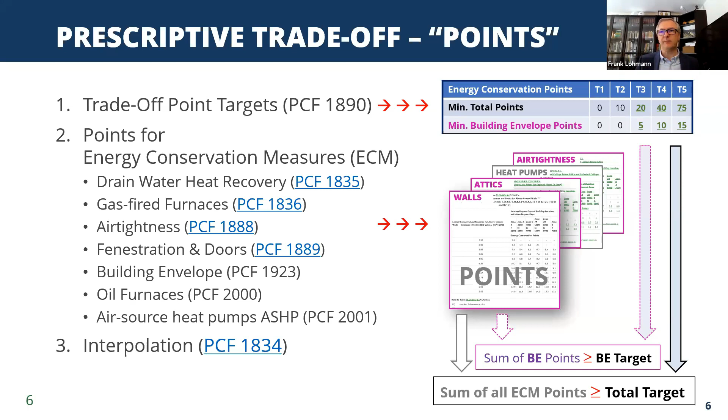First, here's a quick refresher on how this method works in terms of an example. The target points for tier 2, which is already in the code, is 10, but you also need to comply with tier 1 as a prerequisite, which means an HRV or ERV is installed and all the prescriptive requirements in 9.36.2 to 9.36.4 are met.

This is an example we actually presented in 2022 as a part of a webinar as well. For this example, we assumed a 2,000 square foot single family detached home in Edmonton, which is in climate zone 7B. We'll assume an air tightness test result of 2 air changes per hour, so yes, this home will be tested. A heat recovery system with a sensible heat recovery efficiency rating of at least 60%, and a hot water tank with an energy factor of 0.8. This gets you exactly 10 points.

In the 2020 NBC, the minimum points available in this climate zone start quite high for above ground walls and air tightness, and the maximum points for all the other categories may not total to more than 10 points, meaning that you might not be able to reach tier 2 in this climate zone without either improving the above ground wall or the air tightness. Now, this may change in the 2025 code when there are a lot more ECM points available, and we'll see a few of them in a few minutes.

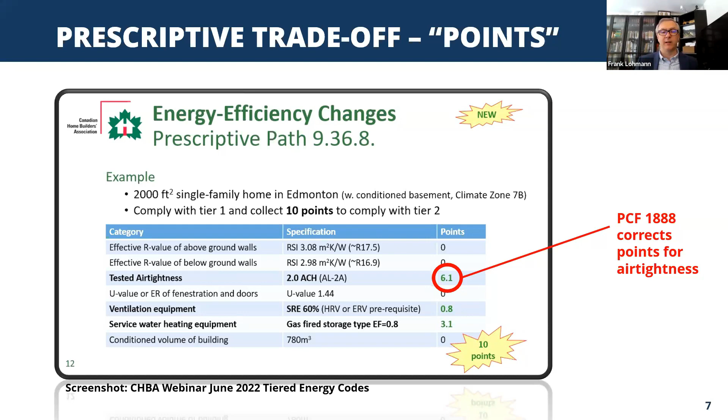So let's start with water heating equipment and look at some points in detail. Here are the points that already exist for a number of water heater types. Our Edmonton example here, a house had a gas-fired storage type heater and got 3.1 points for that. One thing to note here is that electric water heaters do not get any points. Apparently, because in the modeling they are the reference benchmark, but nonetheless, we think they should be listed here as an acceptable solution. We might put a comment to that effect because we think it's otherwise confusing that they're not acceptable.

Another point here is that heat pump water heaters are not getting substantially more points. This may be surprising, and it is due to the fact that when the modeling was done for these points, the reference house also got a heat pump water heater. So there were very few points here to be gained. This is not the case under the EnerGuide, I'm told. The committees agreed to look into it, but the work has been deferred to the next code cycle. So this will be one comment that we're making, although it may be discarded as it is not related to any actual proposed change, but actually to the existing code.

Yes, and I will leave the targets pinned to the top here for your reference. And you have probably noticed the QR code on the bottom left. If you scan it, you can read along on the actual proposed change form online for those that are out right now.

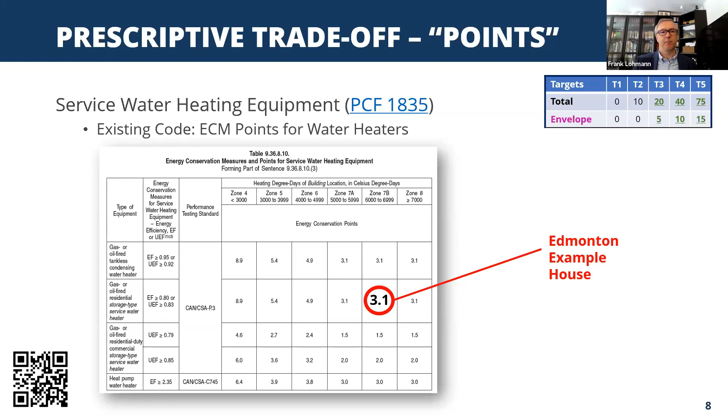Here are the points for drain water heat recovery, proposed to be added. A few other requirements are proposed in addition to these points, meaning you have to do a few things before you get them. You have to follow the manufacturer's instructions. If 1 or 2 showers are in above ground stories, you have to provide all of them with drain water heat recovery. Where there are more than 2 showers above ground, at least 2 of those showers have to be equipped with drain water heat recovery to get these points. So if this is a feature in your homes, these points would go towards your total target points.

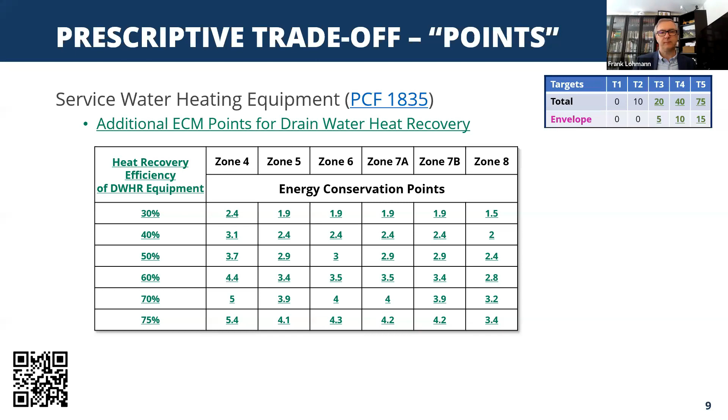Let's continue with HVAC equipment. As you recall from the Edmonton example, the points for HRVs are already in the code. However, considering that a sensible recovery efficiency of 60% is the prescriptive minimum for HRVs and ERVs, the points on the top row of this table are kind of free points because that's your minimum anyway. But that's where the Edmonton example came from, as you see the 0.8.

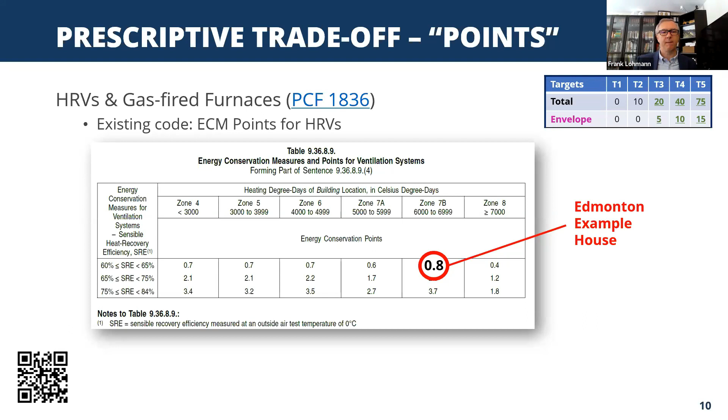What's proposed for gas-fired furnaces here, although these points don't amount to much, I've not seen any points for electric resistance boilers or furnaces here either, maybe for the same reason as for the water heaters. So that's something to be clarified - maybe Alexander can comment on that later. This is for gas-fired furnaces, the points for these 2 efficiencies, depending on climate zone.

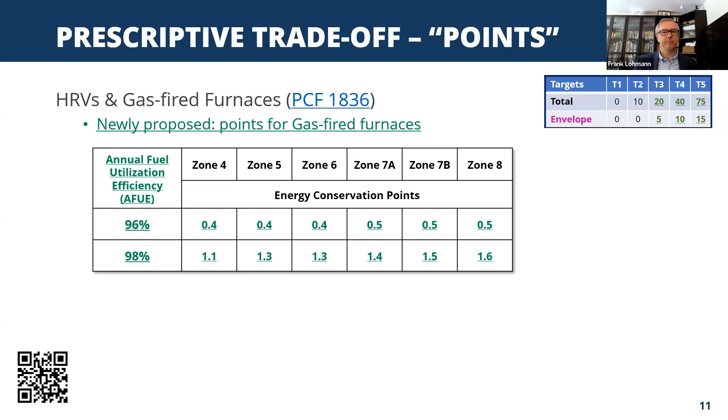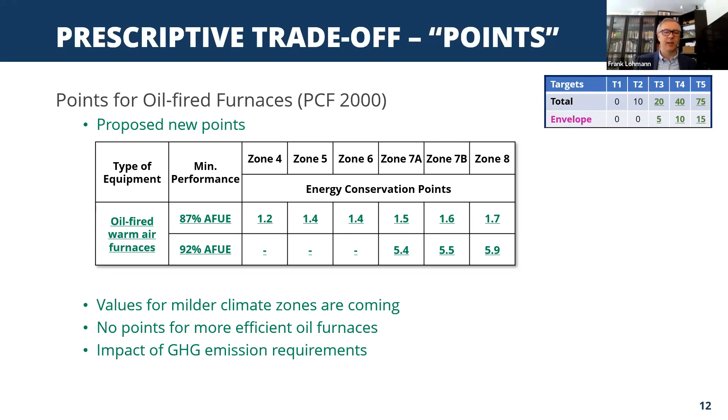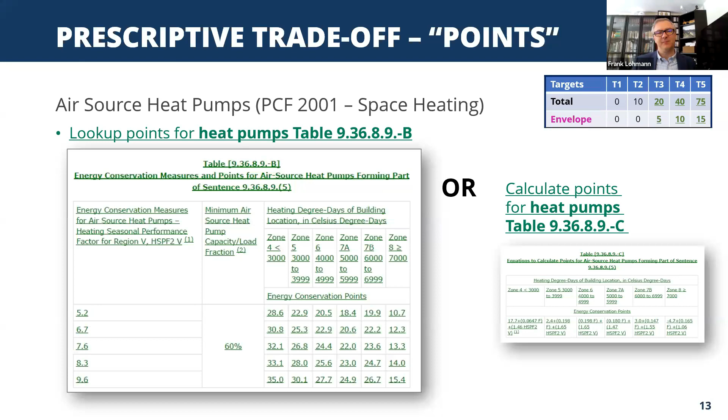So back to air tightness. You remember the example, and I made it easy for you to find it here, highlighted in yellow. This is worth paying attention to, since the energy conservation point values in the code being adopted in your region may change again when the 2025 codes come around. There are 2 corrections made in this proposed change to this table on air tightness. Number 1, the values for attached homes below were moved up 1 category because that was truly a publishing error, meaning 2.5 air changes per hour would give you points in attached housing. The other correction, maybe more significant, is that NRC found an issue with how the points were modeled for the last code and corrected them.

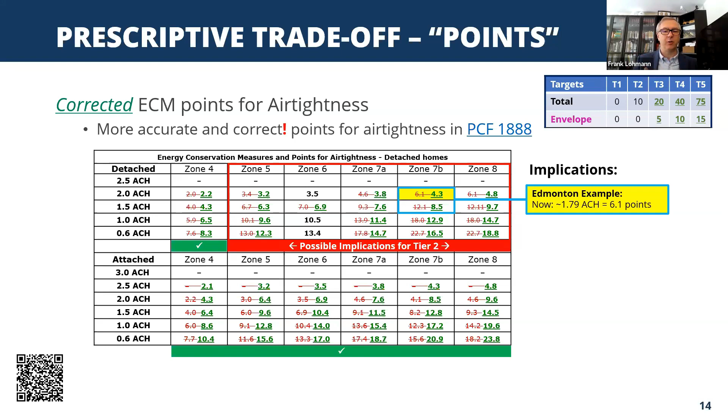So for our Edmonton example, this means you would need a 1.79 air changes per hour test result to get those points now under the new 2025 code, where under the current code an ACH of 2.0 was good enough to get the points. The same is generally true for all energy conservation points values in climate zones 5, 6, 7, or 8 for single-family homes, except for zone 6, which remains almost unchanged. For attached homes, it's the bottom table - the impact is that you get more points for the same air tightness value compared to what's in the code today.

Another important proposed change deals with interpolation of ECM points. This is a great addition.

PCF 1834 simply adds a footnote to all the point tables for all kinds of things to say that you can use linear interpolation between measured efficiency and points. This applies to all tables, not just air tightness. That is how I calculated the 1.79 air changes per hour to get my 6.1 points that I needed to meet tier 2 in Edmonton.

There are two methods generally. A graphic method, on the left, you would draw two axes, one for points and one for ACH, and then connect the two data points that you know from the table. And then you know that you need 6.1, so you find that on your axis and you go up to the data line and you see what kind of ACH value corresponds to it. Or you use the calculation method on the right. I have started that with the formula at the top and filled it out for this example and did the calculation. So you'll have that in your PDF. It'll come in handy, and it gives a lot of flexibility if you're between points.

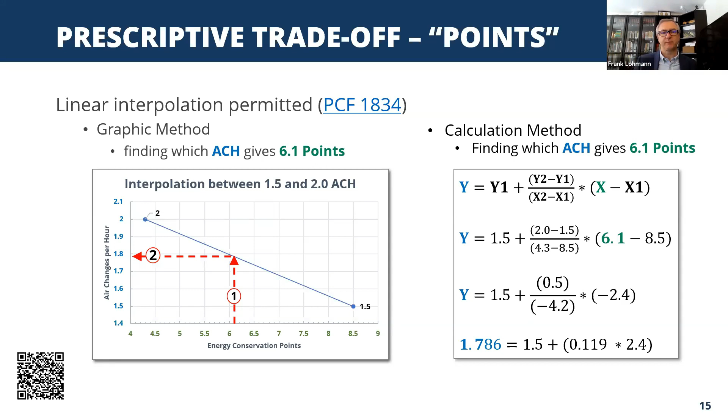That brings us to windows and doors. Here we already have some point values, and there are some that are proposed to be added.

One thing I noticed on this change is that the costing is based on 2019 costing data that was updated to include inflation. However, we've done a review and found that the industrial product price index, at least for construction-related products, may have gone up 45% since 2019, and that labor cost is also up by between 25 and 28%. So if you review this change, make sure you review the impact analysis section and let us know whether the costing data needs updating here. We would make that part of our comment as well.

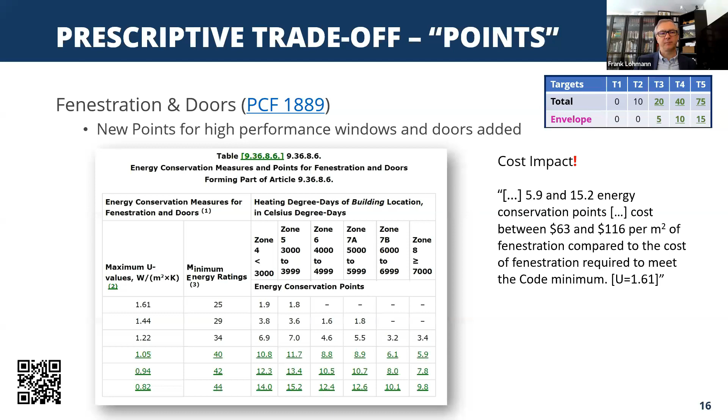Here's PCF 1923, also called Building Envelope Central, and this change is going to the 2024 winter public review. I called it Building Envelope Central, it's not officially called that. This table for walls is already in the code.

I will flip through the next 7 or 8 slides very fast. They all cover the tables that this proposed change contains, so all informative. I just want you to see what is proposed so you can check it out, what categories of ECMs are available, and then you do your own calculations about them.

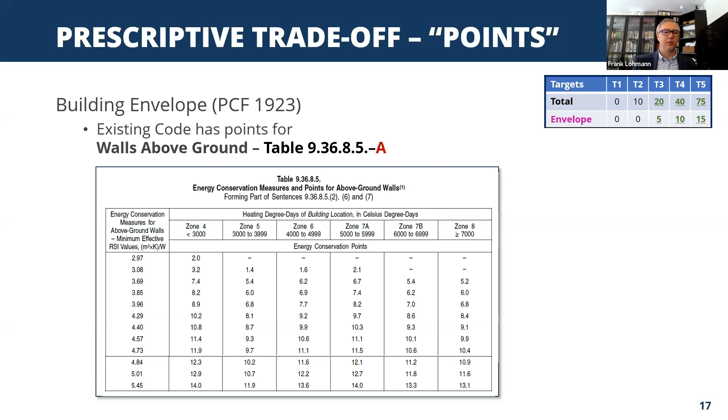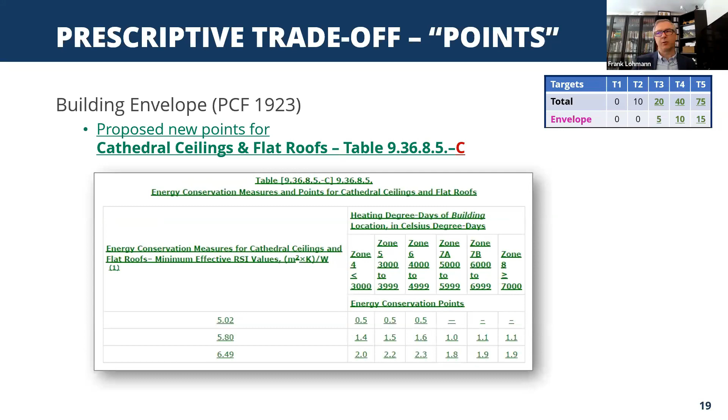Here are the proposed points for cathedral ceilings and flat roofs. A very similar story to attics. Again, even fewer points because the R value is not as high.

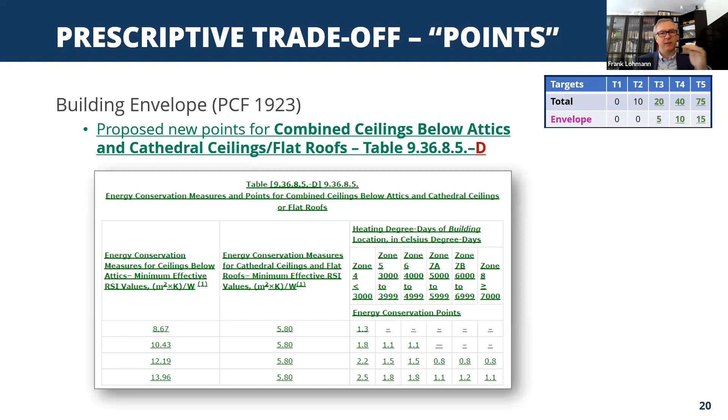Here are the proposed points for assemblies that combine ceilings below attics and cathedral ceilings and flat roofs. I just learned, and maybe I'll explain it here, that this is for roof types that have both the attic ceiling and the cathedral ceiling. Maybe Alexandra can explain this a little bit more at the end.

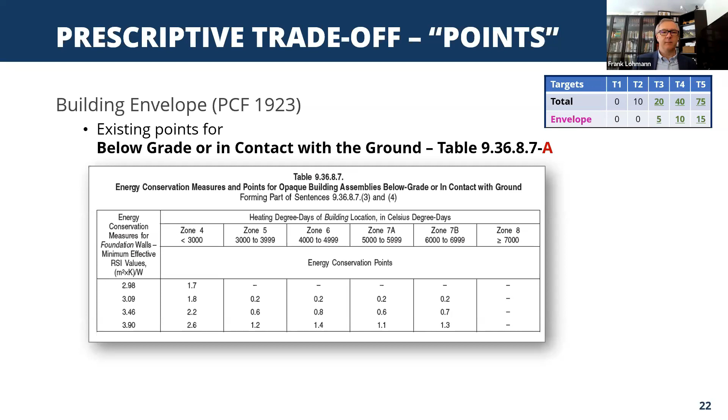There you go. Okay, and for the last table for this proposed change, this is the one for slabs on grade. All these points are proposed. These points were not necessary for tiers 1 and 2, but when the committee realized that tier 5 was pretty difficult to reach, especially in colder climate zones, they added all these points tables. And keep in mind, this is so it's for tier 5 as well, tier 4, tier 3, and for other tiers now.

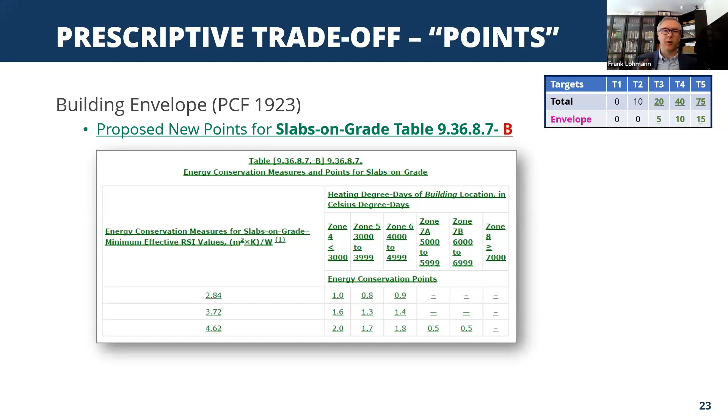Several questions coming in on air source heat pumps as well as DWHRs. So I'll start with one: is an air source heat pump supposed to be the principal heating device to get the points, or can it be dual fuel hybrid? That's a really good question, I can take that one on.

As Frank presented, there were really two approaches under this prescriptive points-based approach. You could either use a table that fixed one key variable, which is basically how much of your peak heating demand is being met by the heat pump. One table fixes that at 60%, and you're able to look up exactly how many points you'd get for that type of installation, which implies that 40% of that peak heating load is being met by some supplementary system. I'll be talking in more detail about that specifically later on in this webinar.

Great response, Alex. Another question regarding air source heat pumps, so perhaps you'd want to take this one as well: for the air source heat pump requirement, does it specify if they need to be cold climate?

Very good question. Under the Tier 5 prescriptive package that Frank will be covering next, there is a requirement for it to be cold climate. However, some of you following the evolution in the regulatory space around air source heat pumps understand that the metrics are changing. There's regulations being introduced continuously—even in 2025 there'll be new requirements, mostly on the energy efficiency regs. I'm going to be touching upon how the energy efficiency regs play with the prescriptive requirements of the code.

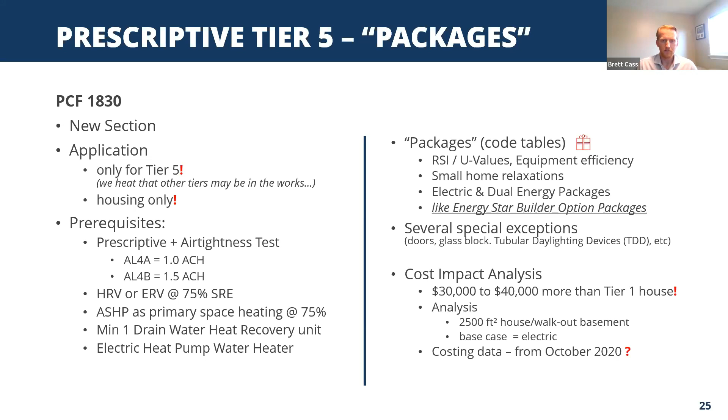Where the homes probably differ a little bit is on the next slide. Maybe those R-values of the wall assemblies and envelope assemblies are a little bit higher than what we might typically see. But keep in mind our builders are able to really optimize and find the low-hanging fruit on their envelope assemblies. So for example, on the wall assemblies, maybe in a zone 6 home, instead of a 5.69 wall, on average we'd see closer to an effective 5 or even a little below 5. That's probably like an R28, R30 or so to convert to R-value. So that's to give a little context on the average CHBA net zero home.

Obviously very few homes build the exact average home. There's a whole variety, but just a bit of context from the voluntary side of things.

Thanks, Brett, that's great. Alex, now you can see if we have questions maybe. Yeah, a lot of great questions are coming in, so I'll start with this one.

Do any of the building envelope tables allow interpolation based on assembly RSI, or only the air tightness tables? I guess what they're asking is, can you interpolate? Go ahead, I don't know if Alexandre wants to answer.

Maybe I don't think you can, because this is a package, take it or leave it. Is that correct, Alexandre? That's correct. And so I just want to clarify that this is a separate compliance path, although it is prescriptive. This one does not allow interpolation. It's inflexible by nature - this is what you shall do.

And the points-based approach does allow for interpolation and allows you to mix and match the measures depending on your supply chain and whatnot. Essentially, this is a copy of the prescriptive path 9.36.2-4 in one table, that's really for tier 5. So that's really what this is with the prerequisites, and this is essentially a copy of all the tables. So there's no interpolation. Yeah, that's great.

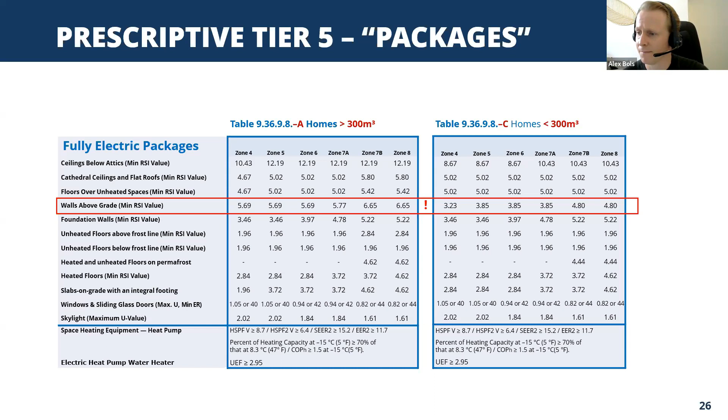Alexandre, you want to take that? Or is it province and territories? Is it government? Do you get the sense from the question that it's governments, or is it province and territorial observers from the industry? Because there's potentially two different answers here, but it's not clear.

So maybe I'll give the one for the industry. If anyone is out there - a builder, renovator, developer, modular builder - and you think you need to get involved, give Alex or myself a call, and we will make sure that you find out where the discussions take place, so that your perspective from your region or locality or province is reflected.

And that's incredibly important. We do our best, but sometimes we miss things. So that's my answer for the industry, for the observers.

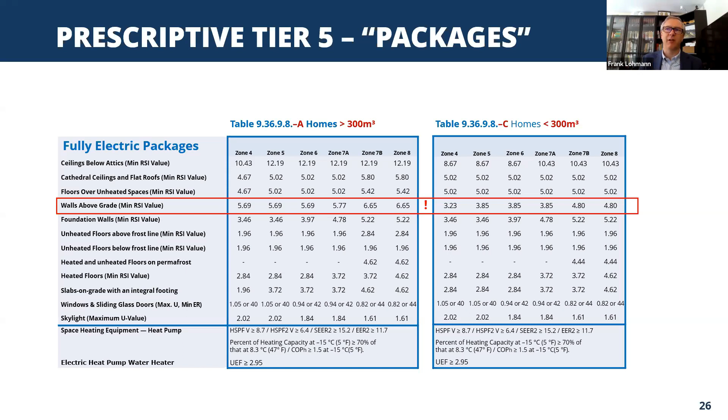In terms of provinces, how can provinces get involved? Maybe Alexandre, do you know more about the other tiers, 2, 3, or 4? There is a task group working on that, and I'm happy to share a link to the schedule of when those task groups are meeting so you can join the discussion. Under the new governance framework of the code's development process, the intent is to put the provinces and territories in the driver's seat to provide the policy guidance. However, that's pretty high level, and they generally don't tend to get involved in the nitty gritty, so we'd encourage you to engage at the task group level.

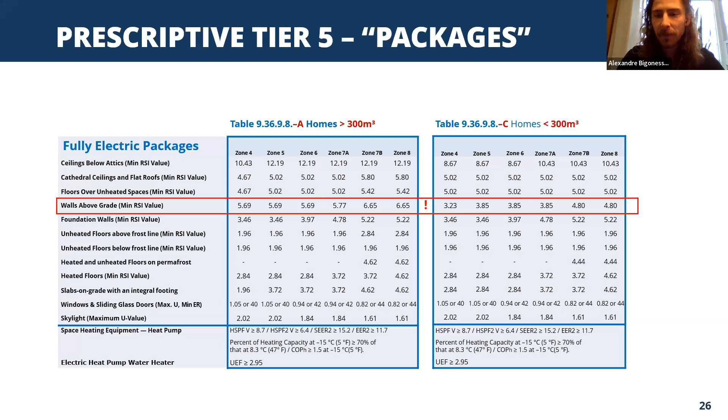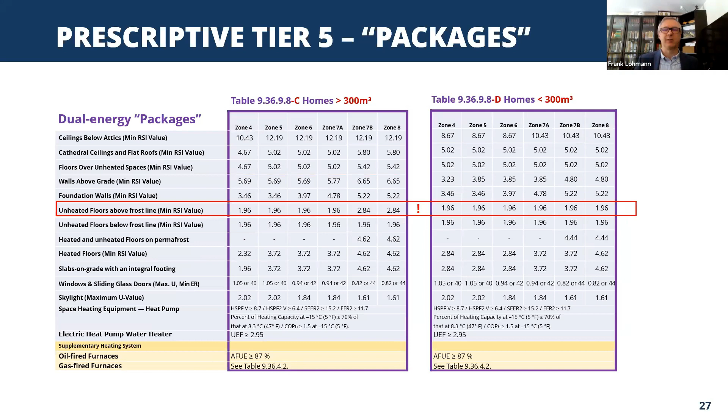Ultimately, CHBA is in favor of that too, so if we can push tiers 3 and 4 with packages like this, we would like to see this. I will try to find out what the timelines are for that. I think, Alex, am I correct?

We need to move on. Is that... You know the look on my face, that yes, definitely. But there's more questions, so Mark, if you have some good ones, mark them for the end. We'll take care of them at the end. Thank you.

This one is a quick one, just one slide. This change is available at public review for comments right now. It was developed by a committee that looked at the potential consequences of high-performance homes. In other words, this change was developed to avoid unintended consequences of highly energy-efficient homes, namely the risk of overheating.

This risk had been identified by many energy committees since 2010, and CHBA had written to the codes bodies in 2020 to fix this before the 2020 codes were published, but to no avail. And this is not the risk of overheating from extreme climate events. It's just talking about the risk of overheating from the point of energy efficient design.

So on the prescriptive side, it is proposed to introduce a maximum solar heat gain coefficient for windows and glazed doors based on how many windows and doors that home has. A requirement was actually in the original National Energy Code for houses in 1997 already, but that one was never added to the fenestration requirements in section 9.36. You can see in this table here, for a given fenestration and door to wall ratio, or FDWR, you'd have to select fenestration products that fall below a maximum solar heat gain coefficient.

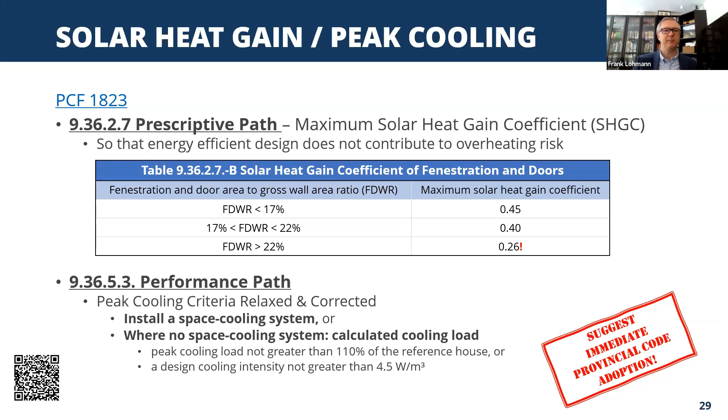Absolutely. And on that, Frank, are you ready to continue to move forward?

Move on, thank you. So the next topic is greenhouse gas emissions, another significant change, another significant first in Canadian building and energy codes. It is proposed that greenhouse gas emissions from buildings be regulated in the Building Code Section 9.36 and in the National Energy Code for buildings. I'll give you a 30-second primer on the life cycle of greenhouse gas emissions.

The emissions that occur during the extraction or production of raw building materials are called embodied emissions, because they have already occurred when the building material arrives on site. Regulation of embodied emissions from building materials is expected for the 2030 codes.

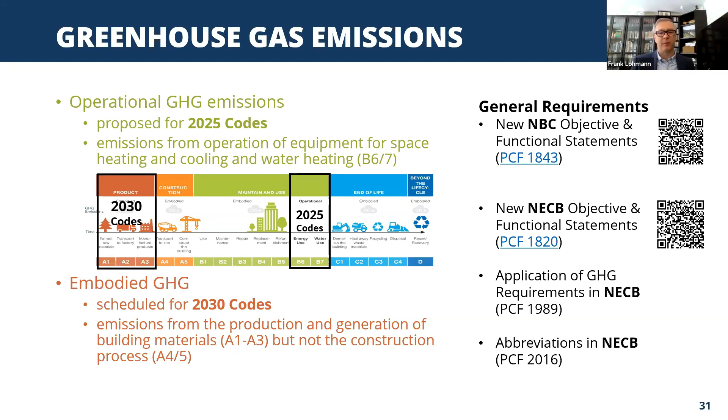So here's what the new objective looks like, and the new functional statement. In short, it says that greenhouse gas emissions are unacceptable, and the greenhouse gas emissions the code addresses are those caused by excessive emissions of greenhouse gases, and the building fulfills the function of limiting operational greenhouse gases.

It makes one point very clearly for sure, but it isn't as well expressed as some of the other objectives. We will be commenting that this is too broad, to the point where the objective, which is the goal of the requirement, is identical with the function of the building that achieves that goal. The third level objective simply repeats the broad goal of the second level objective. We also think the phrase 'as a result of design or construction of the building system' is already addressed by the building envelope, energy, and equipment efficiency. So that's energy.

The emissions, however, are a function of the fuel selection and operation, or at least intended operation, of building energy systems. So we would like some recognition in this text that the control of excessive emissions is not within the purview of building designers and builders, but in the quality and cleanliness of the energy that may come into the building through public infrastructure like electrical wires or gas lines.

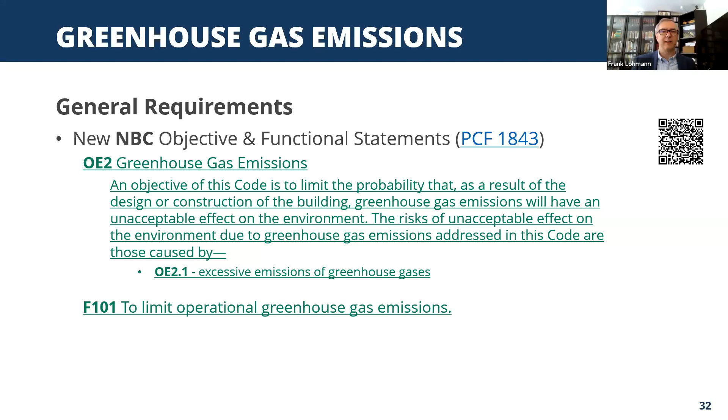So what we are suggesting is rewriting that objective a little bit into OE2, as an objective of this code is to limit the probability that, as a result of the intended operation and the selection of high-intensity energy sources, greenhouse gas emissions will have an unacceptable effect on the environment.

The risks of unacceptable effects on the environment due to greenhouse gas emissions addressed in this code are those caused by selecting energy sources for space heating and cooling equipment and water heating equipment that have high intensity emissions.

In other areas of the building code, a functional statement usually offers the actual function that the building is performing in support of an objective it's trying to reach. It does not simply repeat the negative outcome that the objective has already stated. So in other functional statements in the NBC, it would also use words like control, provide, facilitate, maintain, minimize.

And since the technical requirements only address the energy source or energy type of the building energy equipment, we think this should be reflected in the functional statements. We will suggest, therefore, describing the function a building performs to achieve OE2 as follows: to control the type of energy sources used in space conditioning and water heating systems.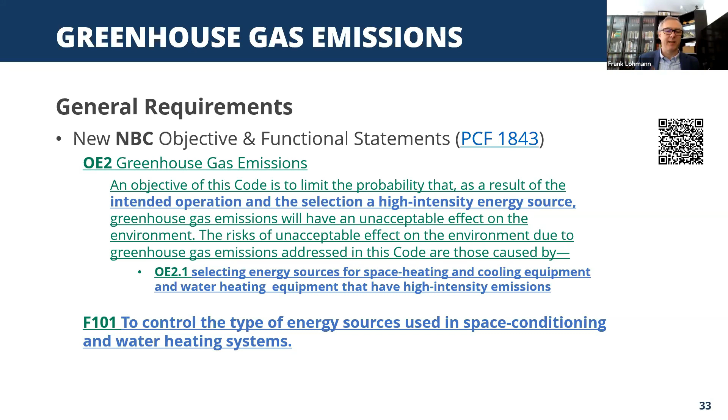So this is likely what we'll be commenting on. Objectives and functional statements are written in much softer language than the technical requirements. We recognize that, but getting them right will be important when alternative solutions are being proposed later on, and then they have to prove that they comply with the objectives and functional statements.

But let's get into the proposed technical requirements. This is the performance path. These changes will go to the winter 2024 public review.

In the energy modeling, your reference house values change with the design of your proposed house. We just heard that example explaining oil furnace versus gas furnace. For GHG emissions, the reference emission factor values are static, meaning the same reference value applies for everyone in the country.

So if you did a short example calculation in your head, you would quickly see that the same house with the same demand load would have a vastly different GHG emission depending on whether it's built in Alberta or in Manitoba. Pretty much everything in Manitoba, even a tier 1 home, will achieve a level A performance. In Alberta, even a tier 5 home might not do better than level C emission performance. This has obviously little or nothing to do with how the homes are built, and most, if not everything, to do with how clean the energy is that the home is using.

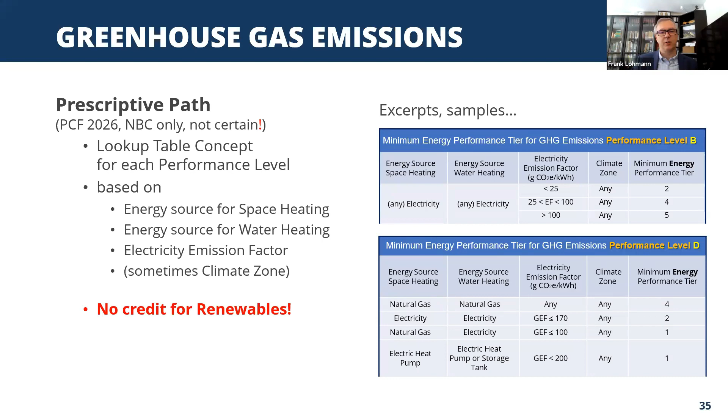And again, no credits for renewables. As I said earlier, we think on the prescriptive side it might be even easier to implement a credit for renewables, by setting a minimum installed capacity and bumping up the performance level based on additional installed capacity. We think in places like Alberta, and others like New Brunswick and Nova Scotia, this would make a huge difference, at least in the short to midterm, say the next 10 years.

It actually originally started as a home in Ontario using gas space heating and gas domestic hot water — that's all that really matters. We found it initially scored an emissions score of an F, and then we decided to take a look at what it would look like if we changed the mechanical systems to be all electric: baseboards and an electric storage tank. Its score moved up to a C when we did that.

Then we wanted to see what an air source heat pump would do to that. So when we did that, it moved up to a B. Then we wanted to see what it would look like with a gas backup instead of an electric backup to that air source heat pump, and in that case it dropped back down to a C.

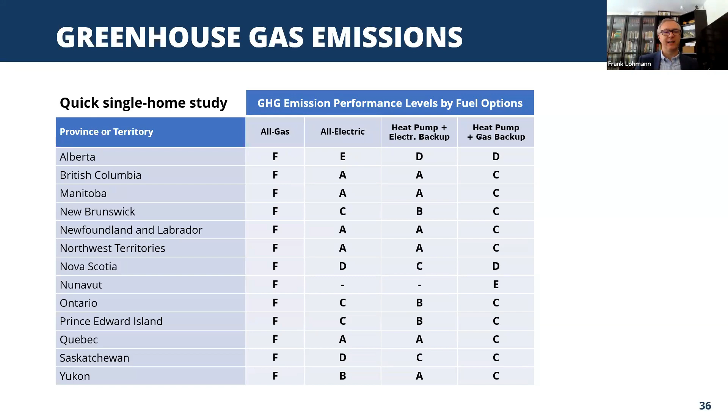We can turn to commentary and questions. Yeah, a lot of feedback, so just want to thank everyone for participating. Kind of a lot of questions from previous slides as well. I guess we'll jump into this one: is there any concern with the new energy code gas emissions requirements going forward for affordable housing, low-cost housing?

I can maybe start that. There's always concern because we know that this is the other crisis in the country, affordability and housing supply, and ideally everything would be cost neutral.

Really, how this will play out is that the code, as it did for the tiers in energy and now for the levels on GHG, provides a pathway to an ultimate goal. We can debate whether it's tier 4 or tier 5. Brett suggested maybe something a little less than tier 5, but ultimately net zero energy was the target for energy, and near net zero is the target according to the policy guidance for GHG, and that will be level A. When, on where, and how the provinces will make that a requirement to get to a high tier and a high level is up to them.

And I think that's what will answer the question on affordability. That's how I would answer it. Maybe Alexandre, do you have another view?

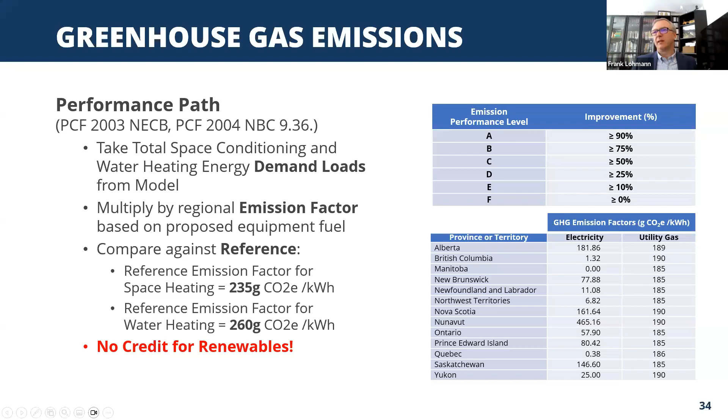Perfect, thanks for that. Frank, would you like to carry on, or do you have time for more questions? Perhaps we'll get the questions later on. Yes, let's go, I think you're right, we missed the time. It's good, this is why we have those little time reminders there for us. Thanks, Alex.

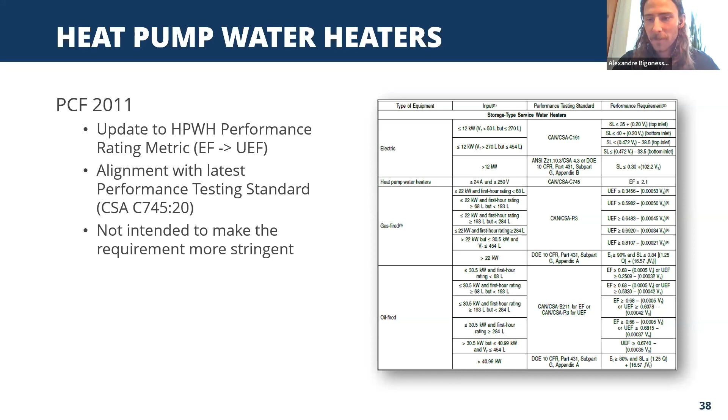Maybe we can move on to the next slide and talk a little bit more about heat pumps. We talked about heat pumps under the prescriptive path, which was an interesting exercise. I want to give a big shout out to Adam Wills, who did a lot of the heavy lifting on this work.

It became evident to us that prescribing a heat pump was going to be challenging. If you're doing performance modeling, it's no big deal, because the model accounts for the outdoor temperature, the performance of the model, and the capacity of the system in comparison to the demand load that the house needs. All of that is taken into account if you're doing the performance compliance path. Under the prescriptive compliance path, it's not as easy as just saying throw in a heat pump, because there are these other variables in play.

Is the heat pump meeting the full heating demand? That's obviously a big variable. The other obvious one is the performance of the heat pump, the output of the performance test. And then lastly, it's the operating condition.

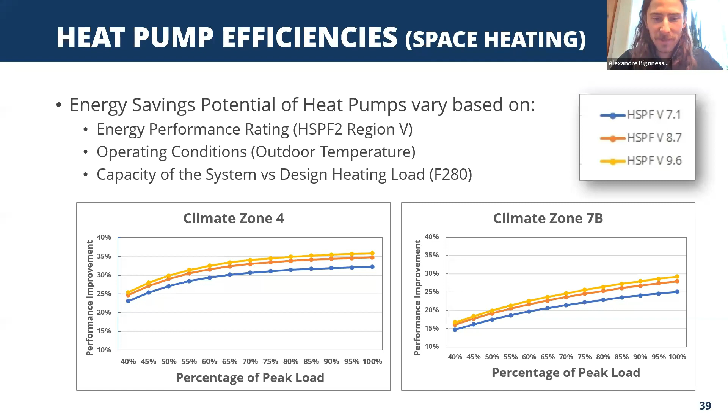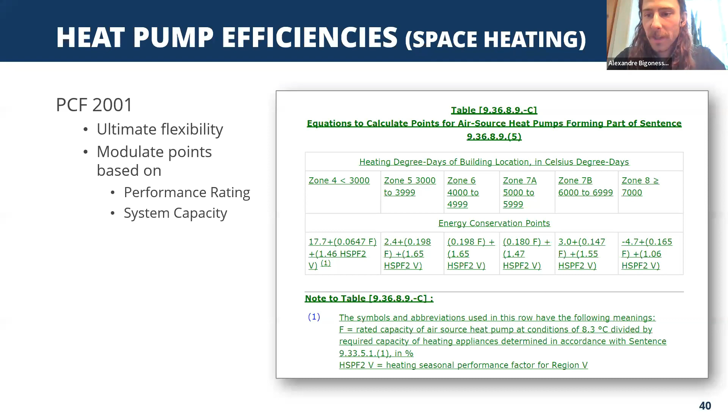There was that other table where the portion of the heating load taken on by the air source heat pump was fixed at 60%. This one is inherently less flexible, but easier to implement because you can look up the value and immediately get how many points you would get for this measure.

That was kind of a long-winded way of saying that it's pretty complicated to prescribe heat pumps, but we felt that it was a legitimate high-performance technology, and we certainly wanted to have points for that. Some of you may remember that the points-based approach was introduced in the last code cycle. However, there were very few eligible measures, so this time around we tried to include more measures to make this a viable path, because we heard that the industry likes this. I like to think that it's really improved with what we're proposing.

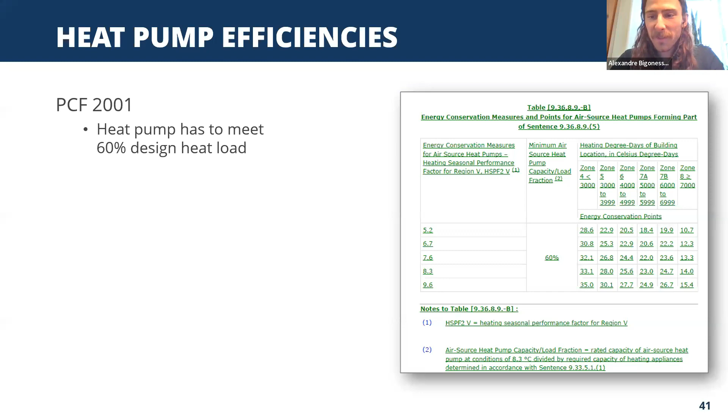Just a reminder, that was from the tiers point system. That's where those tables live for the heat pumps, that's what you get the points for. So for those who use heat pumps a lot and who are familiar with the F280 method as well, I would encourage them to look at that proposed change form when it comes out in 2024. I must say I was challenged by understanding all the details, it's a very complicated matter, and for my taste the code writing was also not very straightforward. So what I would encourage everyone to do is, once that PCF 2001 is out, have a look, and we'll do so as well, and make sure it's clear, understandable, and applicable to how people can use it. And with that, I believe we have all our 5 topics done.

I could do a little bit about how to enter and write comments, or we could continue with questions, and then I'll take the last 3 minutes if that's okay. Alex, are the questions continuing to pour in? Definitely, yeah, it's a really great response, so this is awesome. Alex, I'll send a question your way. Does fixing the test parameter at 8 degrees Celsius incentivize poorer performance units being installed?

Good question, it's really complicated. We're looking at the capacity tested at 8 degrees C, understanding that's not the environment the heat pump is going to be run in. So this was an input into the energy model, one of the data points we could use to come up with this prescriptive solution. Again it's a little bit confusing to explain that it's the capacity tested at 8 degrees C - it does not represent where that unit is being installed. The 8 degrees C, 8.3 degrees C, just reflects the test procedure, and all units are subject to that test, which gives you an ability to compare how they perform at that test condition.